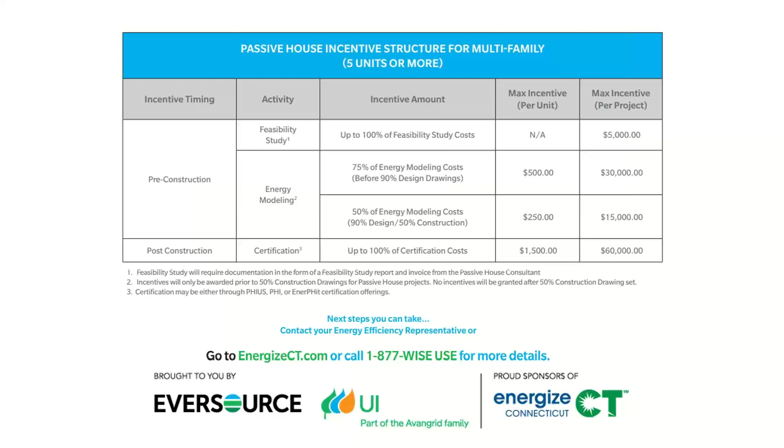Our goal is for everyone involved in the construction of residential buildings in the state of Connecticut to be aware of these incentives. If you are interested in learning more, please visit our website or contact us directly.

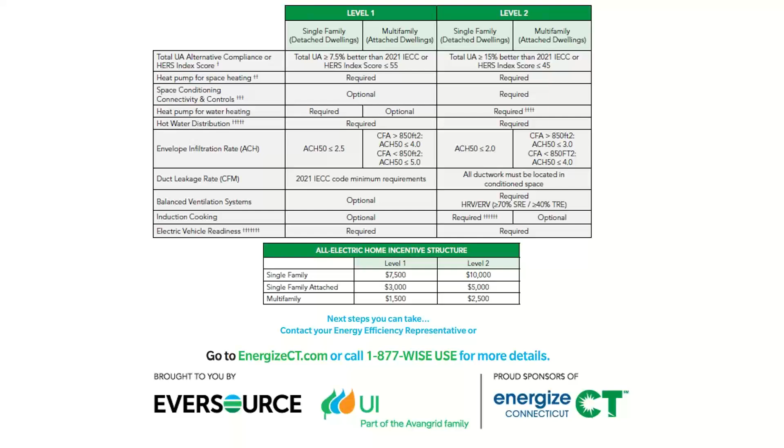Thank you very much, Keegan. Welcome to Geothermal 101, I like to call it, a little quick crash course. I'll go through an agenda, and then afterwards we'll open it up to questions and discussion. Feel free to use the chat throughout. The idea is to have some sort of free-flowing back and forth. This is a sophisticated audience that understands building science and the value behind geothermal, so there's no such thing as a dumb question. All right, let's get started.

The agenda will basically be 4 main points. First, a brief introduction to us, Brightcore, so you understand who we are and why we're authorized to have this kind of discussion. Second, the basics of geothermal. We're not going to go into heavy thermodynamic equations, but we will discuss how systems really operate with the building itself, the difference between surface systems and subsurface systems, and how the IRS looks at these systems, along with some of the more innovative things that can be done with them.

After that, we'll get into a discussion of considerations—what specifically goes into these types of systems when it comes to surface considerations, subsurface considerations, space constraints, permitting, etc.

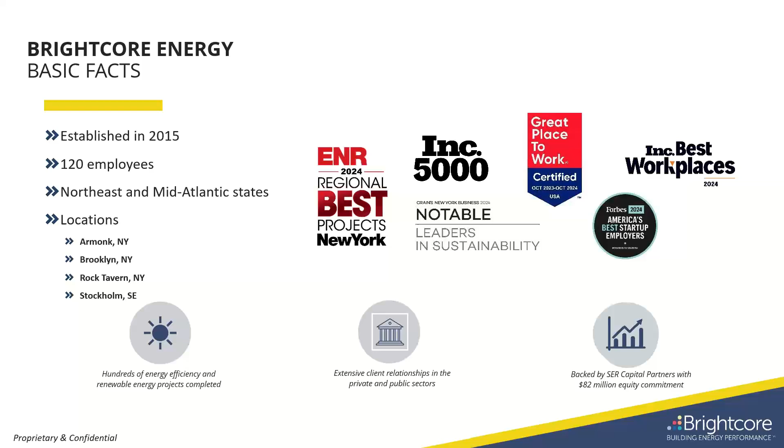So as I mentioned, we have various services. Today, we're going to be discussing specifically geothermal. What came about was this market imperative that the HVAC footprint when it comes to greenhouse gas emissions, especially out here in New York City or other large cities on the Atlantic coast, is due mainly from the heating loads, but also from the sources in which those heating loads are satisfied, right?

Specifically fossil fuels. With legislative and regulatory mandates, as well as ESG goals, electrification has become the lowest hanging fruit. And when you look at HVAC and electrification of HVAC, now you're looking at considerations such as CapEx, OpEx, and really an impact to electrical infrastructure, both as a consumer, but also as a member of a grid altogether.

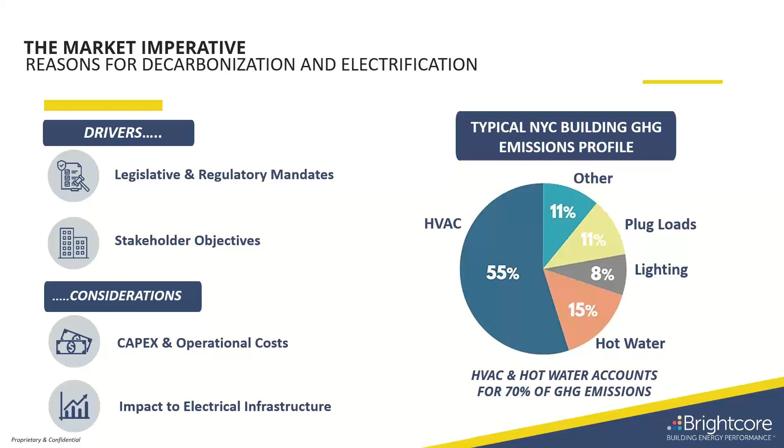So if you notice, plugs, lighting, which we've done, and then hot water and HVAC are two things that can be addressed by geothermal. So when we're talking about electrification, well, then we're talking about, look, all right, if I'm going to electrify, great, I'm sacrificing a gas bill for a higher electric bill.

Well, not necessarily. So the key here is then COPs, coefficient of performance. Some of you may already be familiar with this concept, but essentially what it means is that 1 kilowatt of electricity, which we see on our bill, depending on where we live, cents per kilowatt hour, can then be transferred to become, through mechanical energy, into thermal energy, whether that's air source using ambient temperature outside or ground source, geothermal, using the bedrock below you. And those are both more efficient than your electric boiler or your classic fossil fuel heating system. And I don't mean 10%, I mean by 2 to 3, in some cases 5x the efficiency.

The efficiency can be at peak seasons, because in HVAC there's 2 seasons, not 4. There's peak seasons, hot or cold, and shoulder seasons. And that's how architects and building scientists and we at energy management type companies and developers think as well. So when we talk about the market imperative to electrify, we talk about the solutions that exist and maintaining that core industrial scale vision of being most efficient, ground source stands out.

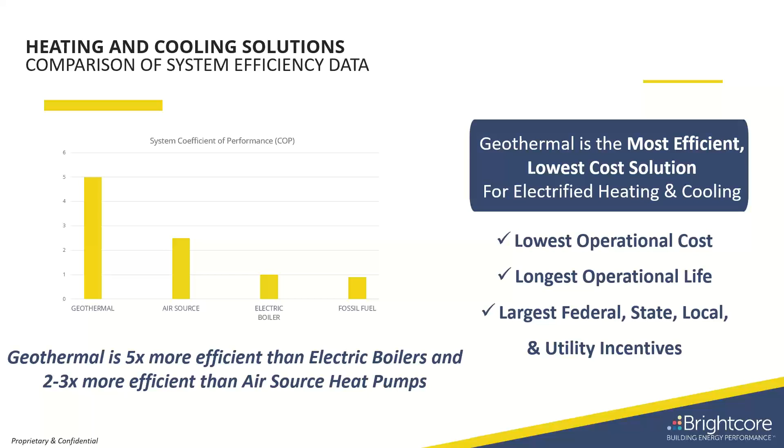What does it mean in terms of a business case? Well, ground source, when you're looking at replacement cost and the OpEx, those are really the winners. The energy costs also decrease depending on your load, but the geothermal post incentive at the first cost is also the largest. And what I mean by that is that an ITC, which we'll talk about as well, can give you 30, 40, or 50% of the system cost, not just the ground system, but also the surface system attached to that ground system. And we'll talk about that in specific.

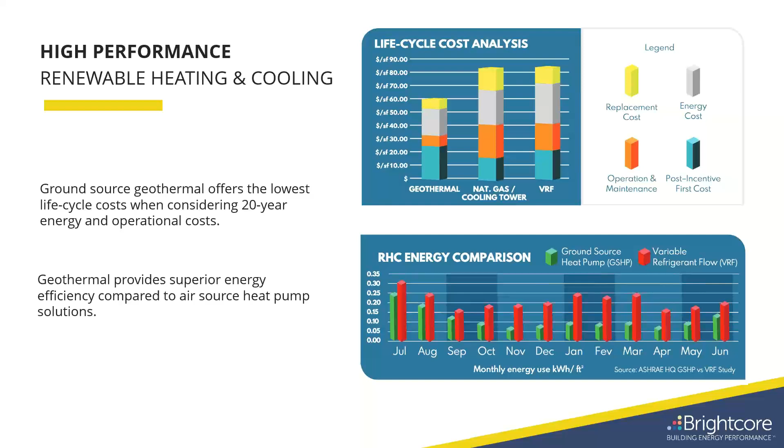So I've thrown a lot at you. Don't be shy about the questions as we go along, but this is really how we got into geothermal as a company and why it makes the most sense, as I'm sure you all know, when you're talking about passive house and being efficient as a building. Now your energy sources are also working towards that efficiency, so it's a symbiotic relationship.

Specifically about policy and how to promote these are the incentives I mentioned earlier. One of the key things is the 5x multiplier, but there's also an added, almost moral imperative when it comes to an energy community adder. These are along the lines of environmental justice and equity as well, which is a big part of the geothermal industry, whether it's underrepresented communities having access to the same high efficiency.

In New England, there's a great nonprofit called HEET. They have this wonderful story of the last grandmother. Essentially all these people along the gas grid have the capital to go into lower efficient electrification solutions, but this last grandmother at the end of the grid is going to be paying for the entire distribution on her own. That's why it's important to have visibility when it comes to energy community adders. So just something to contemplate.

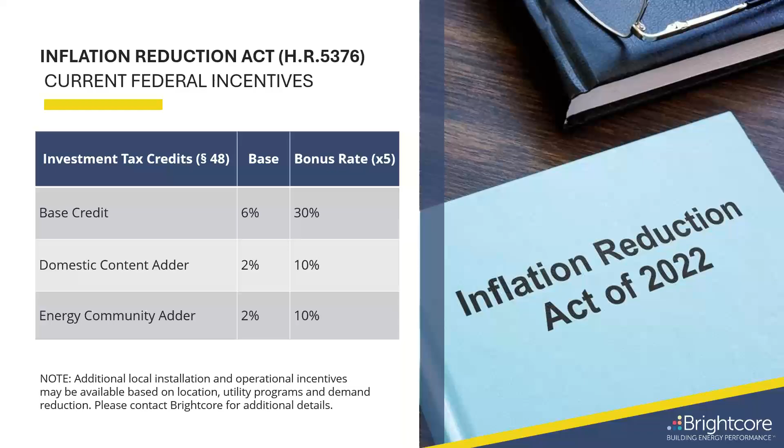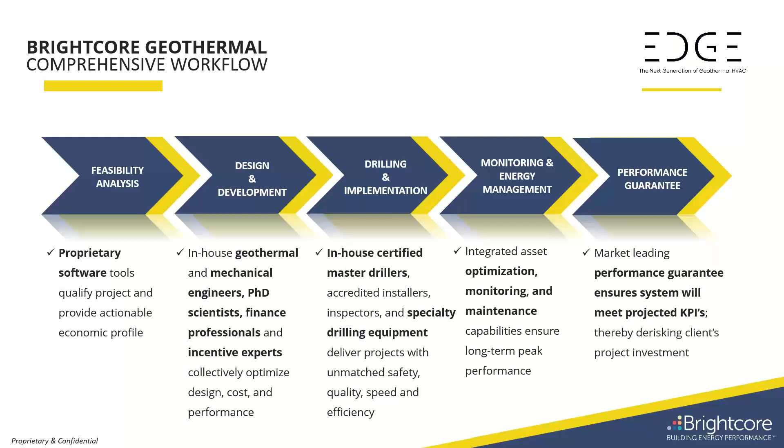You have to take care of this system, similar to geothermal power. There's a reservoir of energy that needs to be exchanged and maintained. That's key, and I want to make that clear: exchanged. Power is not generated, energy is exchanged, which is a different animal altogether. So when we talk about 1 kilowatt in to produce 3 to 5 kilowatts of heat, it's done through exchanging bedrock temperature. And what does that mean?

What that means is that temperature can maintain itself in that high density rock through what's called thermal conductivity, or capacity really. In the summer, it's so hot that bedrock seems like a cooler option, pun highly intended. The idea there is that you will always have an advantage in these peak seasons to exchange. Too much heat in the building? Throw it into the bedrock. Not enough heat in the ambient temperature, like an air source heat pump? Try finding heat in a blizzard for an air source heat pump, it's going to work harder than it should. But the bedrock has that access.

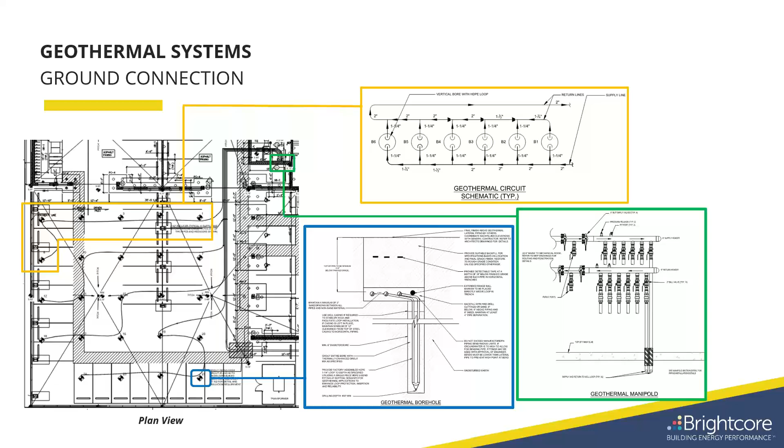This is not a typical water well — let me drill a hole and install your pump and thank you very much. This is an entirely symbiotic system within the building HVAC system that requires this level of engineering and design, in our opinion, and is best practices really in the industry.

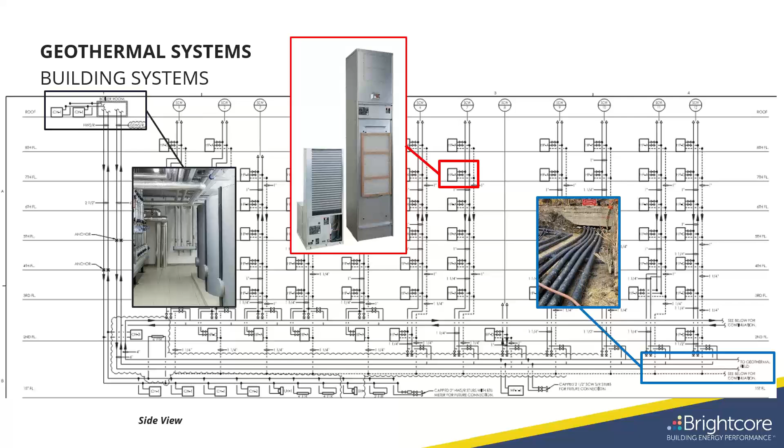And it's a 6-pipe system. And what this also can allow is for air to air, air to water, as well as providing a source.

Let's say in the winter there's excess heat because the building is so efficient, like in Passive House. We can capture that heat, put it back to the bedrock for a rainy day or a snowy day, or be able to transfer that energy when efficient to help in the step up, or the lift, of domestic hot water, for example. So there's a lot of flexibility when it comes to how that heat can be transferred throughout the system.

And there's our larger systems — thermal energy networks, district heating, where you can do ambient loops, central plants. Geothermal really, after the borehole, when it comes up, is a lot of mechanical engineering, creativity, and cooperation with the building engineers and/or facilities management team.

So that's something that's very important, because these systems, like I said, are long-term solutions that need to be carefully crafted, as the building loads will change over time, the usage of the building, and these systems are designed to last 50 to 75 years.

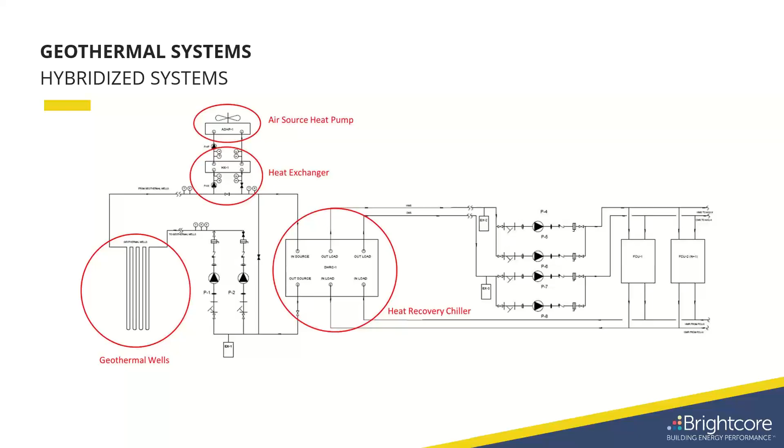Meaning that if you're going to install a ground source heat loop and you're doing Division 23 mechanical engineering work on the surface to a building that is attached to that loop and will be serviced by that loop 75% over the full year, that will also qualify for 30, 40, or 50% from the incentives available.

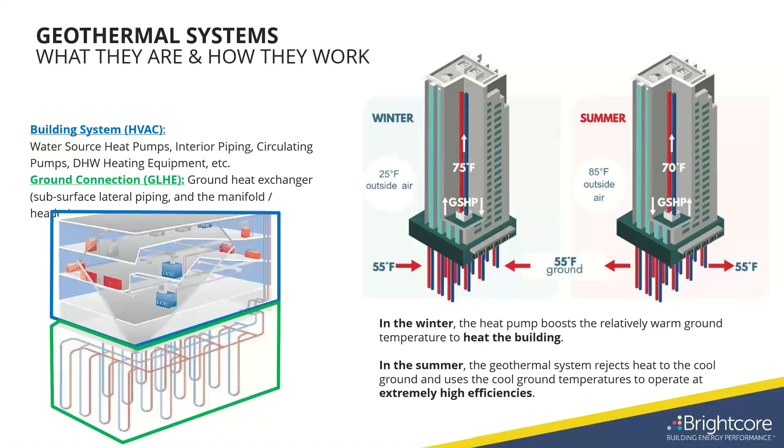Okay, the considerations. So now you see what they look like, how they're installed, how they interact with the buildings, and really the nomenclature behind it. We're going to get into what a good candidate looks like and why.

So when we begin a lot of these feasibility exercises, we really need to look at what is the target load and what can we actually physically install. And you can get creative, and you'd be really surprised at the amount of energy that is literally beneath your feet that is accessible with just a little creativity.

But not because of any thermodynamic limitation—it was more administrative. Mining permits were usually required if you were going to be drilling deeper than 499 feet, from whatever commission happened to have that authority. However, there are two big differences, and I'll start here.

But the final product really is a large column—and by large I mean maybe the size of a basketball hoop—and by large depth, I mean the depth of 85-story buildings, all the way down. And the idea is that it's a loop inside of a grouted column.

Therefore, the grout protects the loop from any lateral forces within the subsurface, but more importantly, perhaps, it isolates these loops from potable aquifers. Once administrators realize that it's not a well—you're not interacting, you're not injecting, and you're not pumping, you are basically an independent system installed within the matrix of the subsurface—it means you can now go beyond 499 feet and not require a mining permit, because of the non-invasiveness of the technology.

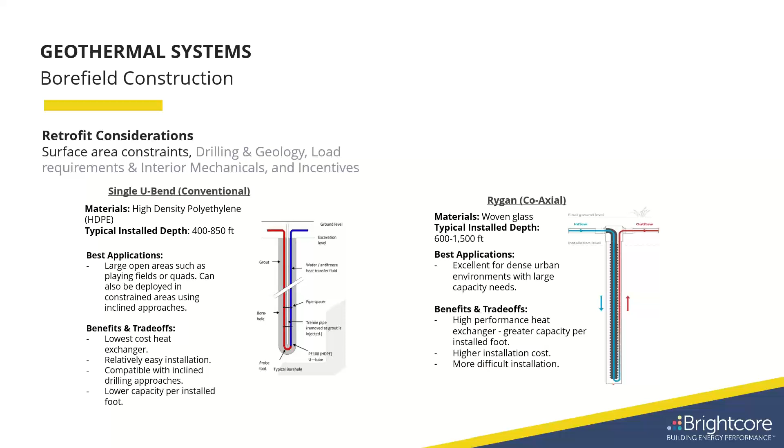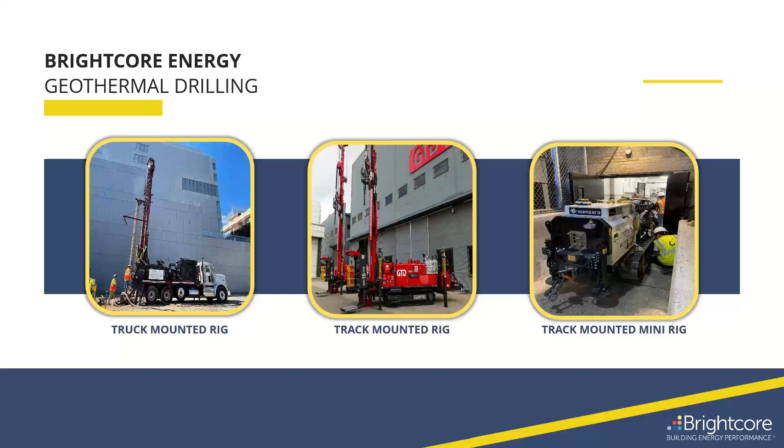What this allows you to do is go into basements of buildings. This is an example of one. It's mining technology where they have very limited space and have to be very quick and very accurate when you're looking for a gold mine, literally in the side of a mountain.

One of the things we have here is these are actual pictures from New York. This is an innovation technology project we did last year near Central Park, and the results will be published, I believe, next year. It was done through NYSERDA. But there's a lot of innovation interest in doing these types of things, especially in retrofit markets. So just something to consider, and that's something the industry has always been looking towards.

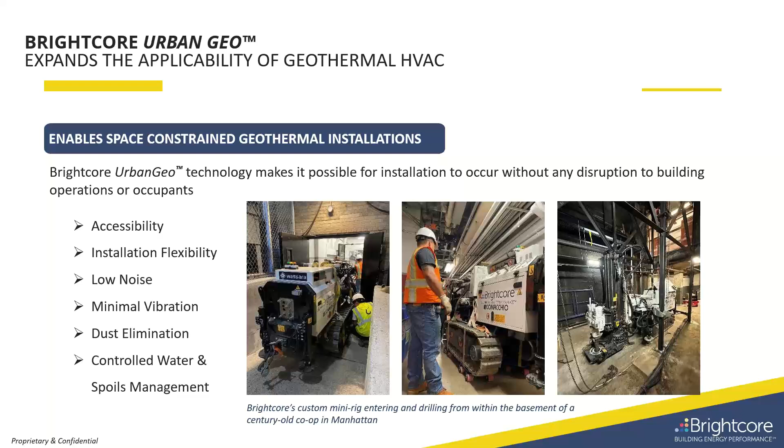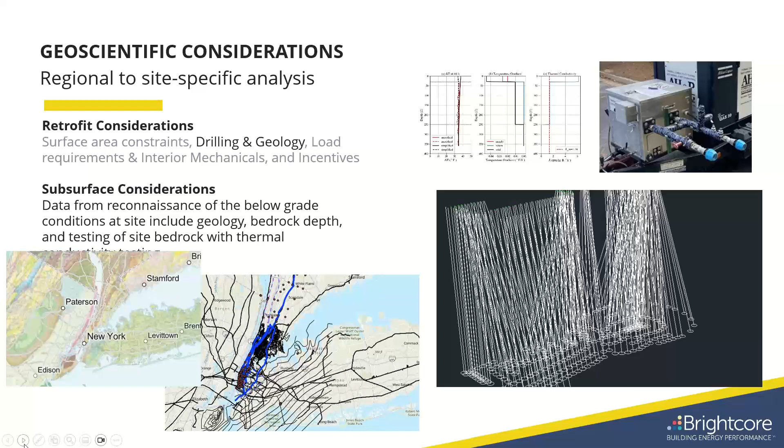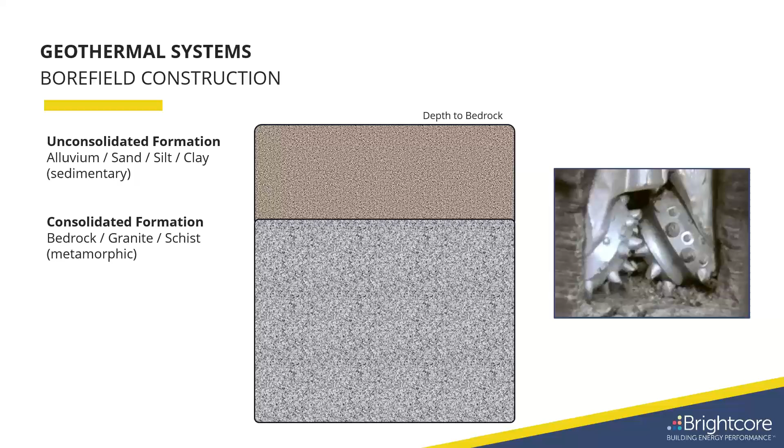Some of these systems can be quite advanced, but I'll go over a very simple example in the next slide. You may have seen tricone bits before, but how they actually work is you've got spinning cones on a spinning device. So you've got several rotational spins that can create torque. Anybody who tells you they can drill a perfectly straight hole...

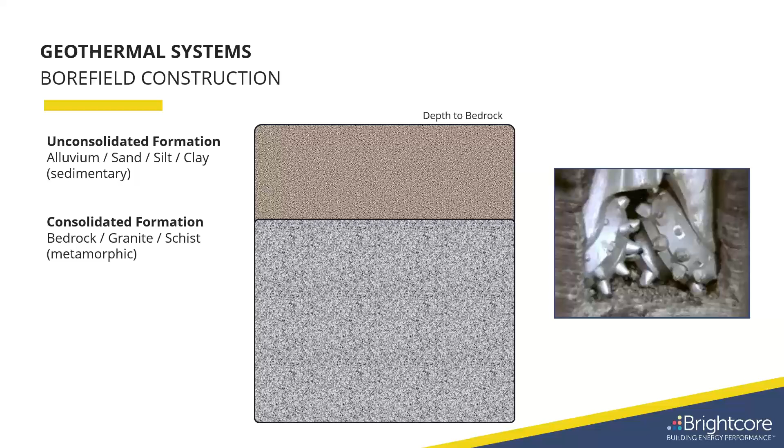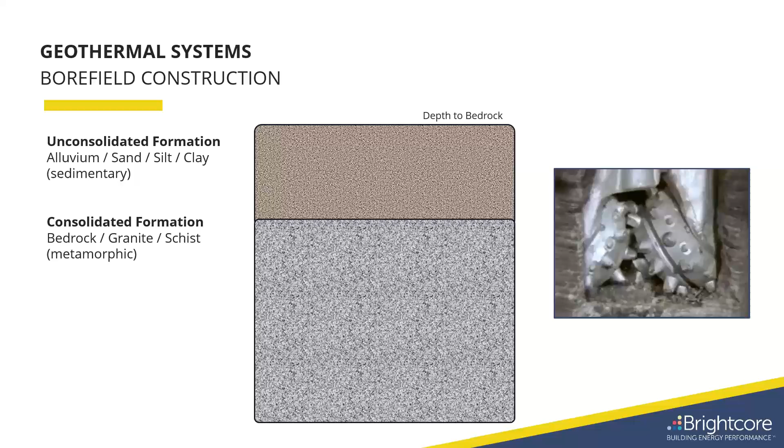Ask them for their snake oil too. No, it's really hard to drill a perfectly straight hole. Any driller worth their salt will tell you as much. But you can mitigate these things and be fairly accurate. It's basically due to conflicting moments and forces that are affected, whether it's a water table, aquifers, or various formation differences. But this is the overall general idea.

What that does is allow you to drill through unconsolidated material with that bit and heavy mud to hold back the unconsolidateds until you hit bedrock. That depth to bedrock is important because that's where we drive in casing. That casing is like when you dredge a river - you build dams all around so you have access to the subsurface without stuff getting into your project area. No different. Unconsolidateds are held back by steel casing, driven into good bedrock, creating a seal, and now you have an area to work in through the bedrock.

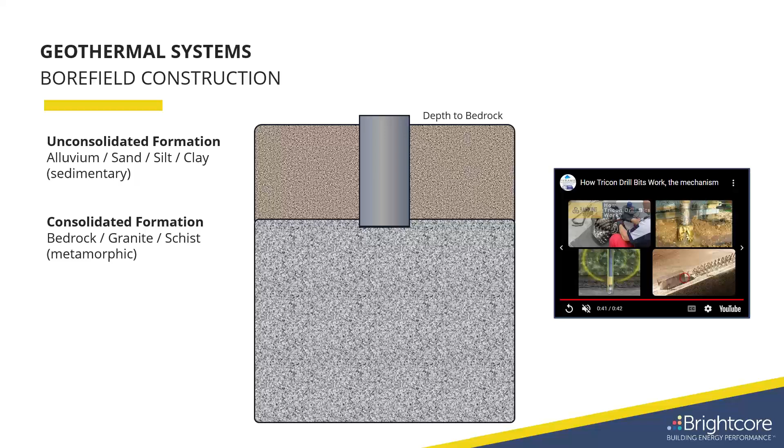You may hear from people that bedrock's really hard to drill with. Well, nothing's hard if you have the right tools. That's what we employ, whether it's air hammer, water hammer, or PDC - polycrystalline diamond compact bits - which work really well in these tough metamorphics: schist, granite, gneiss. You've got shales even that can be kind of hard. These are indurated metamorphics that have been around for hundreds of millions of years, so you've got to pack quite a punch to get through them, but it's definitely doable at a commercially scalable rate.

Once you get through this bedrock and reach your depth, based on your testing you know how much tonnage you're going to get, and you run your loop. This is a U-bend loop, schematically speaking, and then grouted from the bottom up. That grout will then displace by higher density all of the fluid that was holding that borehole open, whether it was water or mud. If it's air, there's not much to displace.

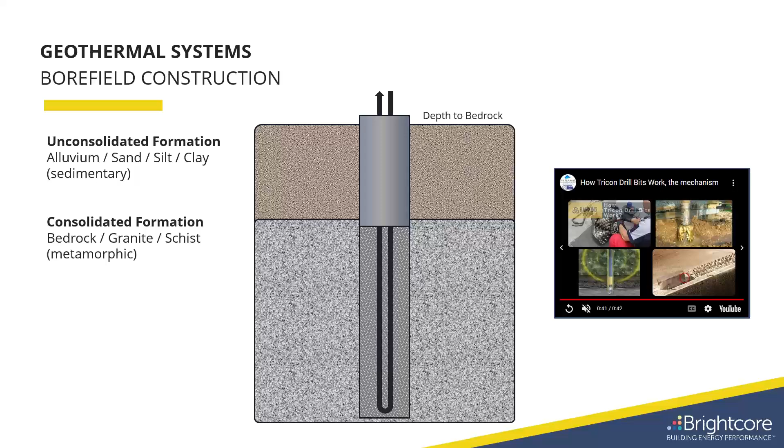It's typically water in the water table, and that grout displaces that, and you are now left with a perfectly, ideally grouted column, similar to a soil nail in a retaining wall. You have this high density column within the matrix, and over and over again, you can create a field.

Now, this is a typical vertical bore field. Spacings can vary depending on how much tonnage there is, and there's some specific interference the closer they are bunched up together.

That is how we design them according to our numerical models. Pretty advanced, and they have 4D, which is really a transient system. It's how does it react in XYZ space over time? And you need that because little t time changes, but also delta T outside, peak seasons, shoulder seasons. So all of that has to be modeled over at least a year to give you really what the system is going to look like on a cyclical scale.

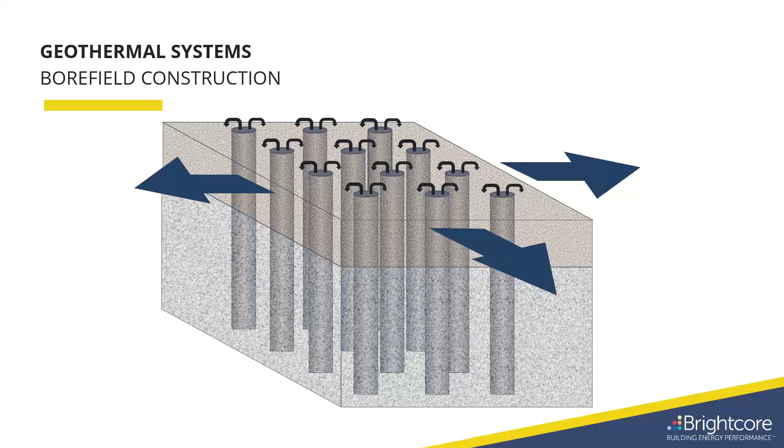We have all these loops then either connected through circuits, as I mentioned, and expanded every which way. Now, let's say you don't have a lot of area. Well, you got to get creative. So as I mentioned earlier, mining, for example, typically does not drill straight. They drill at angles into the sides of mountains. So incline drilling is a known technology with very little risk that we know how to do in the industry. All three of those rigs that I showed you can be inclined at surface to do angle drilling.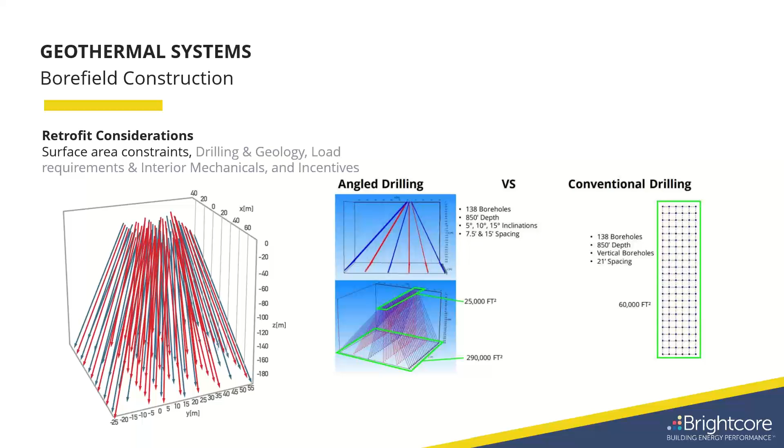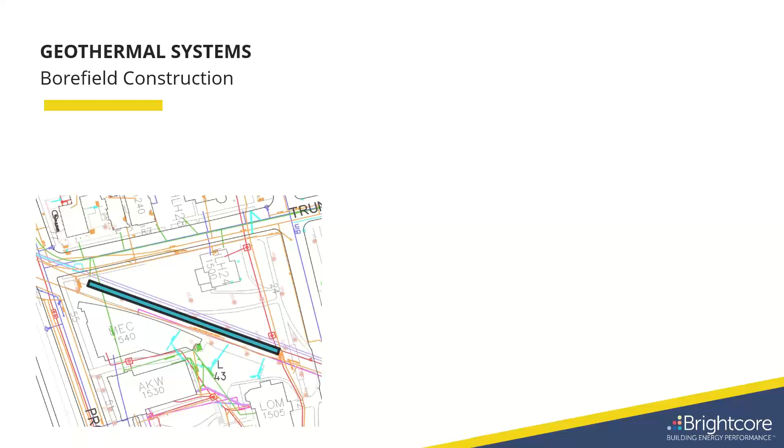And a real world example in Connecticut, funny enough, is as follows. You're given a path in a well-developed area, and you have to say, what can you do for me here? Now, conventional thinking, as you saw in that previous green square, will mean vertical boreholes drilled at specific distances. Let's say you can fit 20. Now, if you bunch them up closer, but you angle them out, you can fit much more thermal mass and loop into a system, meaning that same bike path can now turn into the equivalent of a rugby field to acquire the energy and exchangeability for your project.

Now, side view looks like this. You've got 1.5, 4.5, 7.5 degrees from the vertical, and you can hold that with those drill rigs, as I mentioned, and really increase your capacity while decreasing your surface impact.

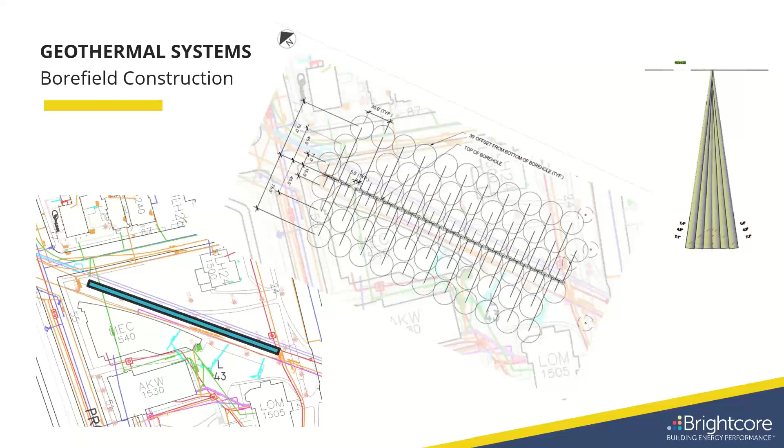And that's important. When you look at this, you see telecommunication, gas, water, electricity. There's a lot of headaches to be avoided, but there's also an aesthetic thing to this. We are green drilling, and typically that means low impact of all kinds. So the more compact our systems can be at surface while still accessing the same energy is a win-win for everybody across the board. And this, for architects and for users of the building, is a win-win overall.

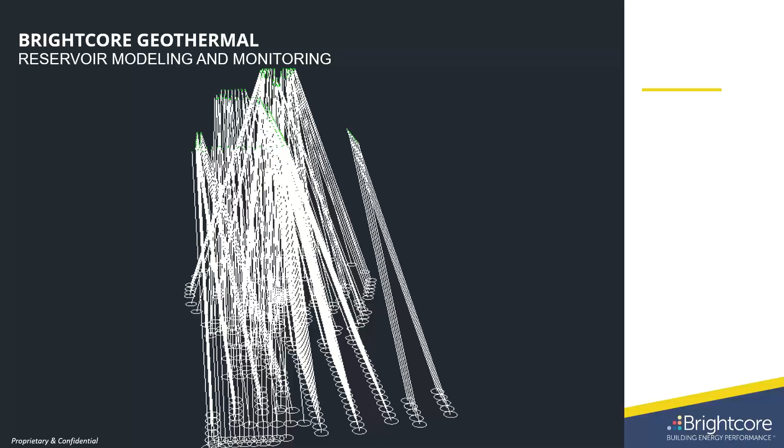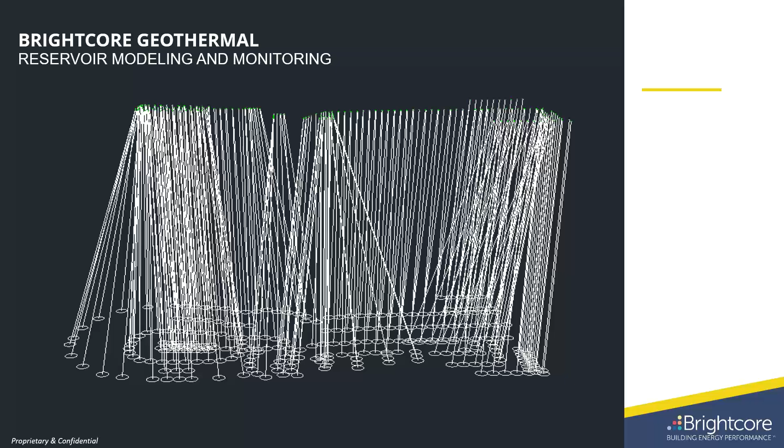That system grew to be this system. You may be able to see where the path was and how it splayed out and evolved. And it evolved into a bigger project that is now a thermal energy network. So you've got multiple systems talking to various plants that then talk to each other. And if some place has heat to give and another place needs it, it can be exchanged through a full network. So, if you think back to having your own computer, and then when the internet was born, now you can have a local area network, and now we have wide area networks, and the networks continue to evolve and become more advanced. Therefore, the systems do as well.

Okay, so now let's get into innovation. We're going to combine everything we've learned here. So this is a project that was done for thermal energy storage. Now remember, thermal energy storage requires typically high thermal conductivity and capacity, which means usually higher density rocks. Well, a lot of skyscrapers were built on a very famous high density rock in downtown New York, which would be the Manhattan schist, part of the famous metamorphic spectrum that you see in the North Atlantic states.

The idea here was to see if we can store waste heat from the summer into the bedrock, and access it in the winter through a ground source heat pump, just like these white papers have been showing for 30 years, and projects have been showing for half a century in Scandinavia, for example. NYSERDA said, have at it, let's see it. But to add the kicker, it's going to be a retrofit in a very old building in the basement in Manhattan. Go. And we did.

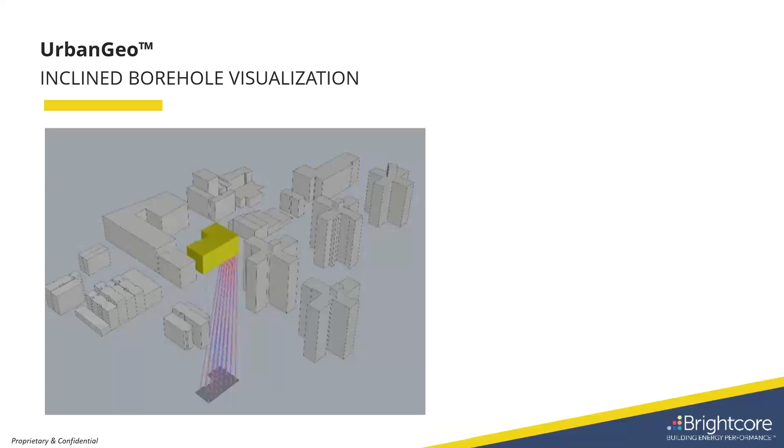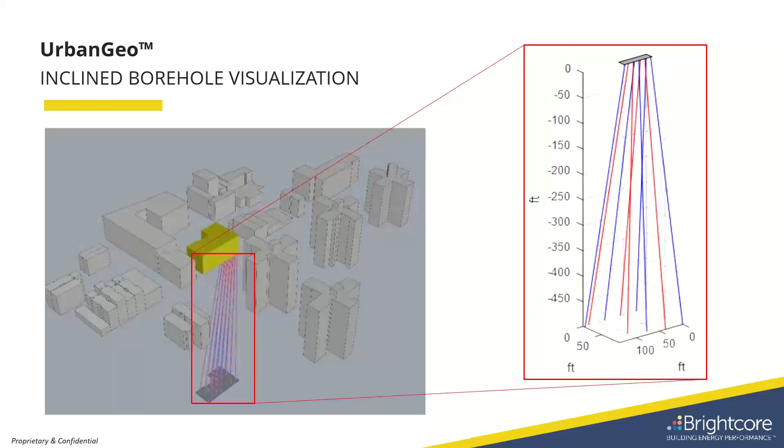We were able to really prove the concept of retrofitting buildings for geothermal in an urban landscape: borehole thermal energy storage, incline drilling, minimizing surface footprint while maximizing subsurface use, in a very well-developed subsurface area, whether it's a subway, water tunnels, or general infrastructure. It was pulled off pretty close to design in general, and what was accessed was enough to create the proper thermal energy storage system.

But then you're able to bring it right back down to position on New Year's Day the next year. That is what makes cyclical thermal energy storage a key component in peak shaving, in overall greenhouse gas emissions, but also in satisfying the IRS requirements of the system always contributing to hit those benchmarks so that you get full ITC. That's where thermal energy storage is a game changer.

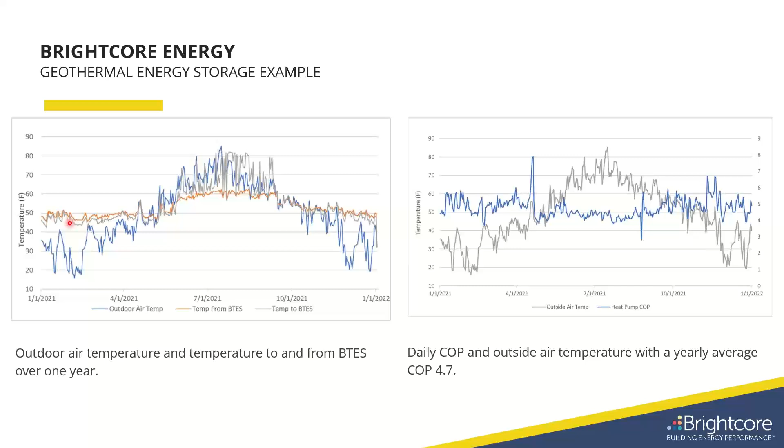Another comment here: cost of drilling appears to be the biggest limiting factor for widespread adoption of geothermal. Are there any ideas or solutions coming online to help make it more affordable?

So the ITC is big. Before, being frank, they didn't necessarily always pencil, or at least not all of them, not most of them. Now, which is why I kept drilling home the point: if you're going to be redoing your system within the building and it's attached to the geothermal system, both get the ITC. What we've seen is that's a tipping point a lot of times.

That ITC being applied to Division 23 mechanicals as part of a geothermal loop reduces your overall cost, which thereby reduces your drilling costs. But second, there are even programs through the utilities where they'll help you with test drilling. We've seen that in New York. Con Edison took on the responsibility of saying a lot of people want to find out if their system is worth it, and part of a true feasibility test is a test hole and a thermal conductivity test. That's not necessarily within everybody's budget, so there's funding to do some of that, and funding to do feasibility studies in general before you even get to the drilling stage. That really reduces your risk before you go into high capex activities like drilling.